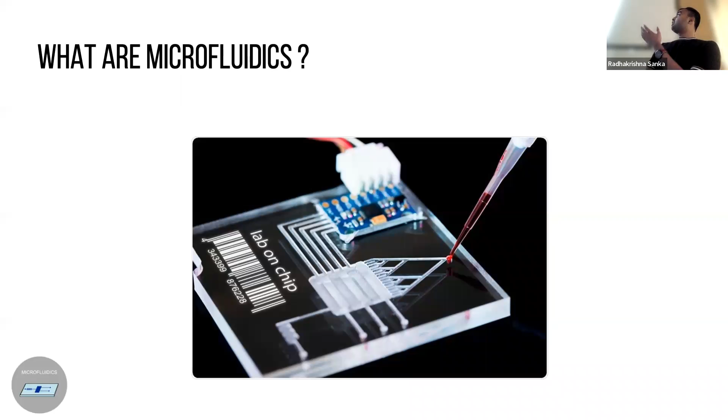So let's start with what's microfluidics. I know most of the folks over here probably know what microfluidics are, but I'm sure a lot of folks on the Zoom call don't really know what it is. So what are microfluidics? As the picture kind of entails, these are small plastic devices. And what you do with them is you insert small volumes of fluid into those plastic devices. And what the device will let you do is manipulate and sense these fluids.

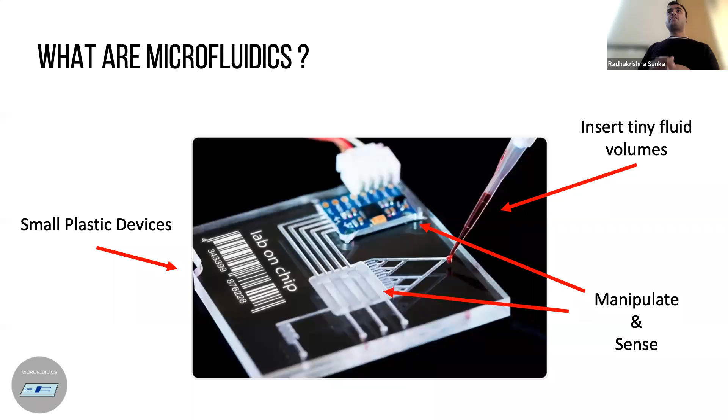And so whether you do any chemistry on it, any biology on it, or even nuclear physics on it, it's essentially just a way to move fluids around. And that is all you need to know for the time being. I'll be giving you more explanations of what it is as we go along.

So where are they used? They're heavily used in diagnostics, everything ranging from a glucose sensor to a wearable, or even if you wanted to miniaturize our entire COVID testing facility, it could be done in a microfluidic device. There's a whole bunch of reasons why that's not happening. And what I'm doing right here is to make that easier to do.

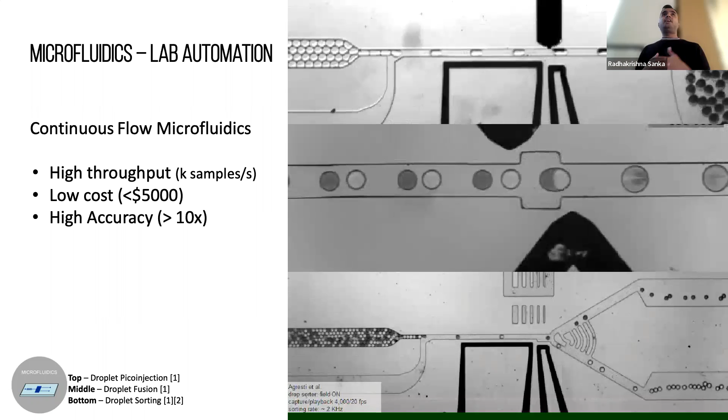So the bigger reason about why you want to do biology is that my advisor is one of the pioneers in thinking about engineering biology like an electrical system. Just like in an electrical system, you have different ways of engineering it, different abstractions, like digital electronics, analog electronics. You think about it in terms of memory, communication, and whatnot. So let's say you wanted to engineer biology in all these different abstractions. You have a whole bunch of activities and you try to think about what metrics are actually important for that.

And so the metric that is actually important as a researcher building these automation systems or research practices is that every practice needs to be repeatable, so that if one person does it, another lab should be able to pick up the same protocol, do the same experiment all over again, and make sure it's actually reproducible.

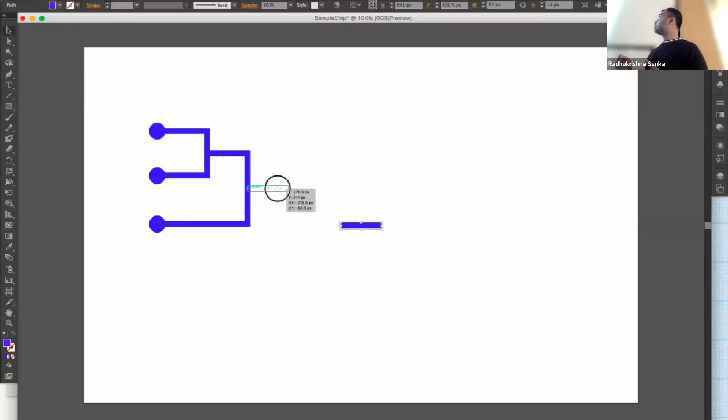And this is a very, very simple device, and it takes you so long to actually make it. Because anything you need to do, you need to draw shapes, draw lines, and make sure you rotate them as it's over there and make it do what you want it to do. So now, as you can see, it is kind of tedious, right?

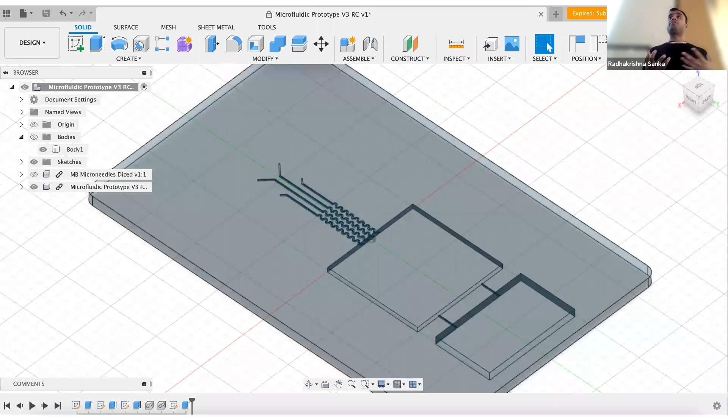Now, the smart people, folks with some mechanical engineering background, go about using tools like AutoCAD or Fusion 360 or name your favorite mechanical engineering CAD tool for actually doing these designs. Now, it's okay. These tools speed up all the work you need to do. You actually can preview what the actual device would look like once you make it, and it's great, right?

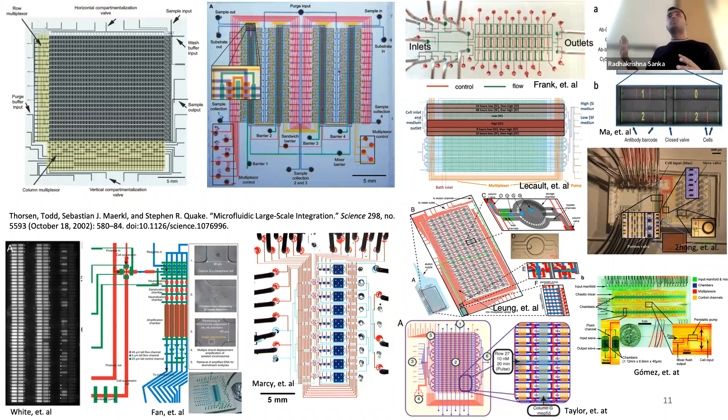So you might be thinking, you know what, Krishna, nobody's ever going to make those devices. All I need to do is make my simple device, and I can just use Fusion 360 or my favorite CAD tool. Or you want to use Illustrator? That's totally fine. But when I think about why microfluidics CAD is actually important, let's say you have an idea, right? You have a concept of what you want to do, like an experiment or some kind of a test you want to do.

So you probably spend about, like, 3 clock cycles, I'm approximating it to a week, just reading up different papers and literature about how these devices might work, who has done what in the field, and you come up with what we call an architecture. So it's kind of like a high level idea about what your device should be. Then you spend about a week making the layout, checking with people who can actually fabricate it, and seeing if whatever design you drew is actually manufacturable.

Then you spend a constant amount of time based on what fabrication process you're using. It might take a day, it might take a week to actually make the device. Then if you have things like valves and whatnot, and you have some automation associated with it, you need to spend some more time scripting the entire thing. And once you do all of this, you go into a verification step where you actually verify whether or not your device is actually useful.

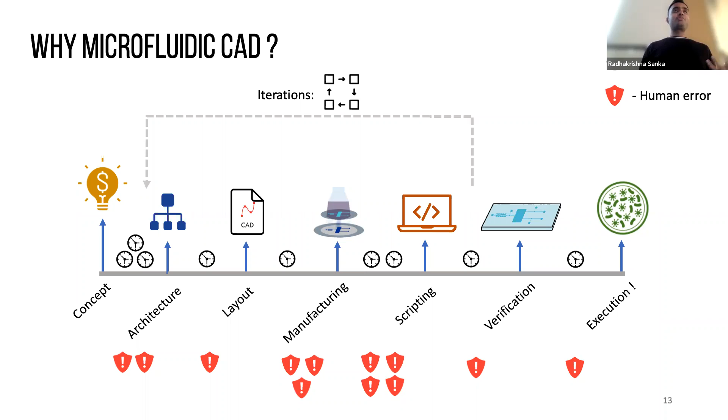And I guess it's probably the most computer sciencey part of my entire talk, where I say, if you had to put an algorithm to characterize from concept to execution, that would basically take you a time of 5 clock cycles times the number of iterations, plus the 4 constant clock cycles that will always take you.

And that's where all the research I've been doing and what I'll be presenting to you helps, because by having standards, you can get rid of these iterations, because you know for a fact that if you make the design in a certain way, it's going to be manufacturable, or it's going to work in a certain manner. Then the second part is you have algorithms that nearly eliminate all the human errors and greatly reduce the amount of time you need to spend actually making the design, and you can go about doing your own favorite hobbies or whatnot.

So if we rethought that entire concept-to-execution phase as a specified design and build process, as you can see in the slide over here, your time from concept to execution basically goes down to the four clock cycles. And that means that we can also do a lot of these things in parallel, auto-generate all of them, and get things done. So I'm not the first person to actually think about these things.

My predecessor, Cassie, was one of the first people in our lab to start thinking about a computational workflow for microfluidics. So in her work, when she started off Fluigi, what she said was, okay, from one of the synthetic biology design tools called Cello, if we give it an input, can we make a microfluidic device that would do the test for that particular input design that you give to it?

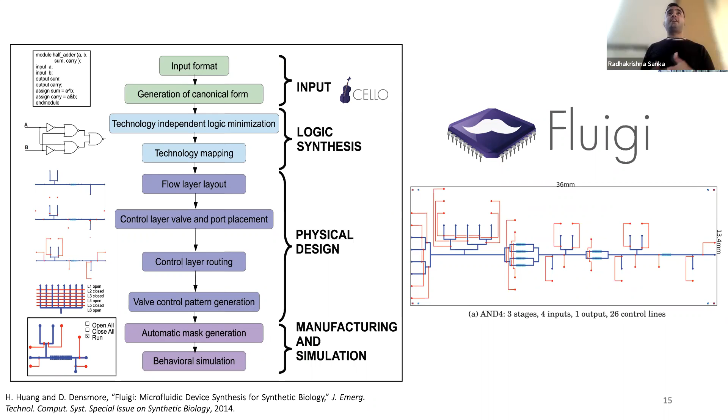So that's where I came in, because I basically took Fluigi and instead of having it as a standalone tool, I converted it into a tool chain. What it basically meant was that I added two new description languages called LFR and MINT for describing microfluidics at different levels of abstraction. I introduced a standard called Parchmint that would let different research groups and industry be able to share these designs and actually capture all the details that are usually missed in literature.

Then I built two CAD tools called 3DuF and Neptune, which you will see some short demos of during the presentation, which allow anybody to go in and start doing it. We've had everyone ranging from high schoolers to grad students use these design tools to make devices while hardly knowing anything about microfluidics.

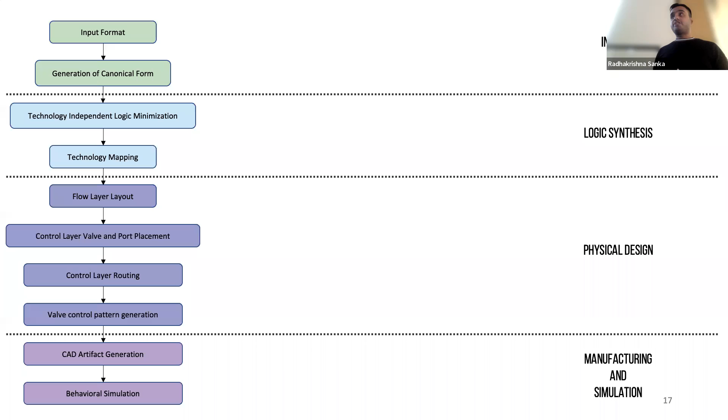So if we think about this entire workflow, which my predecessor Cassie put together, we basically split it up into input and logic synthesis, physical design, and manufacturing and simulation. That's how she divided these things broadly. So in her work, when she did it for the Cello input, there were certain kinds of input formats and canonization that was done for Cello.

So she knew exactly what the input would need to look like, and she knew exactly what output needs to be generated for that given type of input. So she created the entire logic synthesis step, and she basically hit it out of the park. She went all the way through, got physical design done, got everything done. So when I came in, to kind of parrot one of the things which my descendant, I guess, Ron said, what is left for me to do?

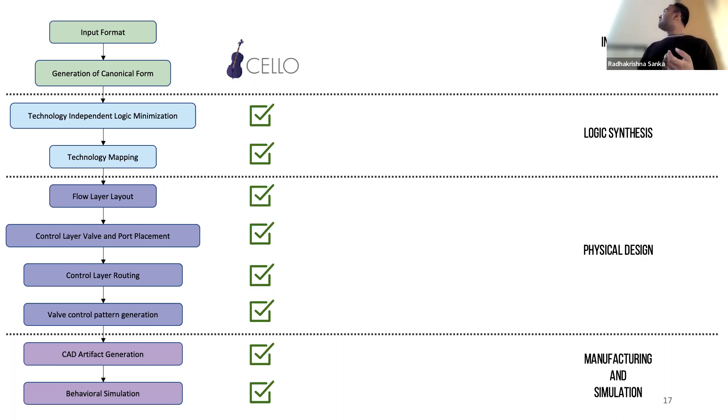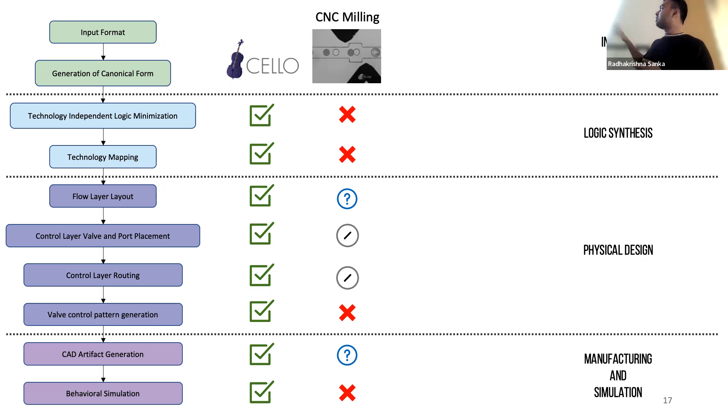So I was like, no, wait. If we needed to take the same tool and use it for CNC milling, it's not really synthesizing what we wanted to do in our droplet scenario. And maybe it's not going to generate for us some other examples too. And we're not sure if the manufacturability is actually valid.

Then we were like, okay, fine, let's try laser cutting, like what some of our friends at Mo's lab use. And we were like, okay, can we still generate the designs? Can we generate the layouts? Can we do that? A lot of things were still up in the air. But when it came to synthesis, you couldn't actually do it at all.

And similarly, because the main platform which Cassie considered was photolithography, there was some promise for it to actually work in photolithography, but almost all of it was unknown. So the first part of what I did during my dissertation was I looked at how do we solve this manufacturability problem. If we made a design, we should be able to manufacture it. Otherwise, this tool is useless.

Then the second thing I did was I looked at, okay, can we improve the way in which the physical design is working? Can we extend it and make sure that we're getting design outputs for every kind of device we throw at it? And the third thing I did was, okay, fine. Now we have this whole pipeline of algorithms and whatnot. Can we actually synthesize these things and have representations and formats which make sense?

And that's essentially the contents of my entire dissertation. So every now and then, we'll be revisiting that slide where we have the checkboxes, and we'll be looking at these things. So the first part, as I mentioned, was the manufacturing.

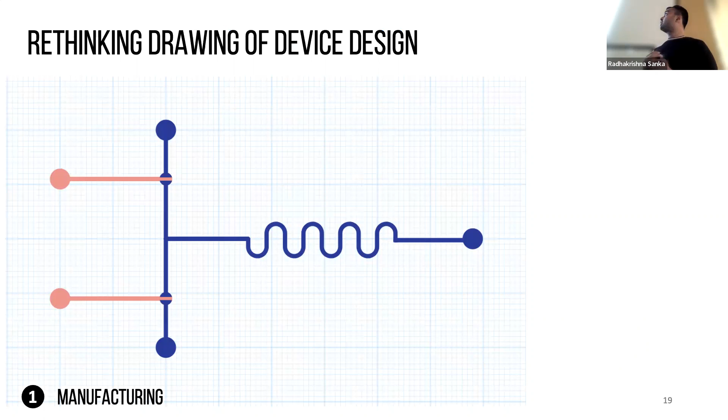So we'll be first starting off with the manufacturing. Thinking about manufacturing, the first step was, you saw how people typically designed microfluidics. They were actually drawing on a canvas. So the first thing we needed to do was rethink how people were doing this. And what that meant was we essentially said that we're not going to draw anything anymore. We're going to decompose the designs into components and connections. That way we can store it as an object and utilize it.

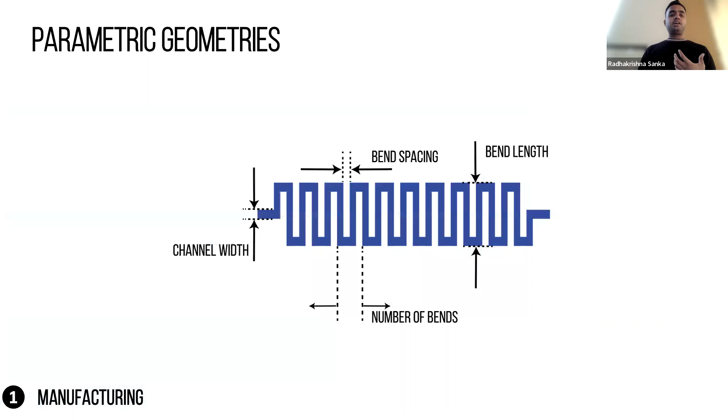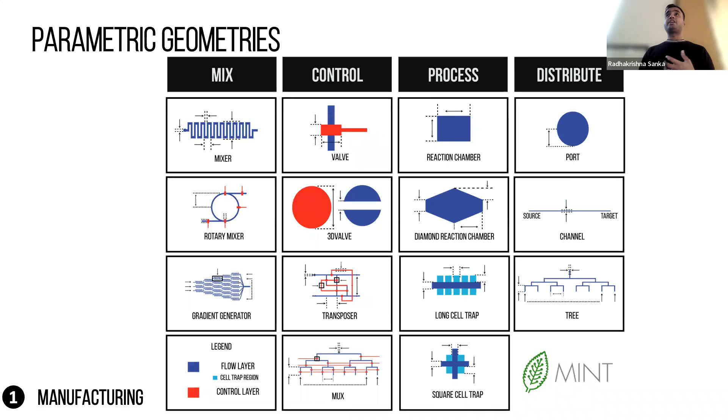And what that meant is that each and every component would also be parametric, and it would allow us to do any kind of microfluidic engineering. So we created this entire library of components which we could use for any design. And the best thing was, because all these components were procedurally generated, it meant that it was scalable. Drawing the one on the right would have taken somebody forever. And that's where you have the real power of using procedural design.

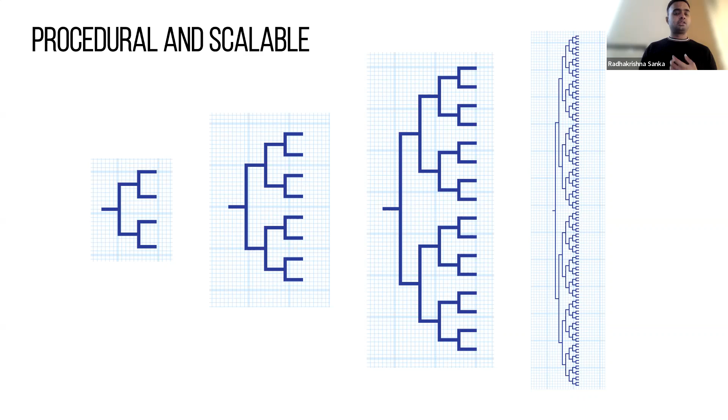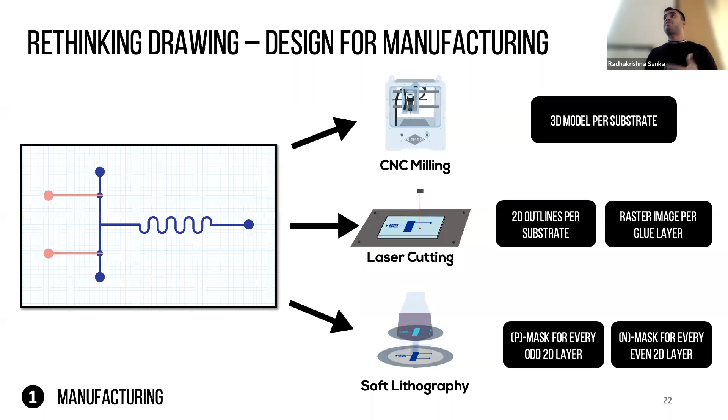So the next part was, okay, now we talked about rethinking the design, how we abstract it. What about the design for manufacturing? When we looked at the different manufacturing processes, we realized that all of them require different types of CAD artifacts for the software and the downstream manufacturing process to actually manufacture it. So we took every single component and connection and started decomposing them into what we call features. And I assigned a DFM class to each one of these features to indicate what kind of manufacturing capability it would have.

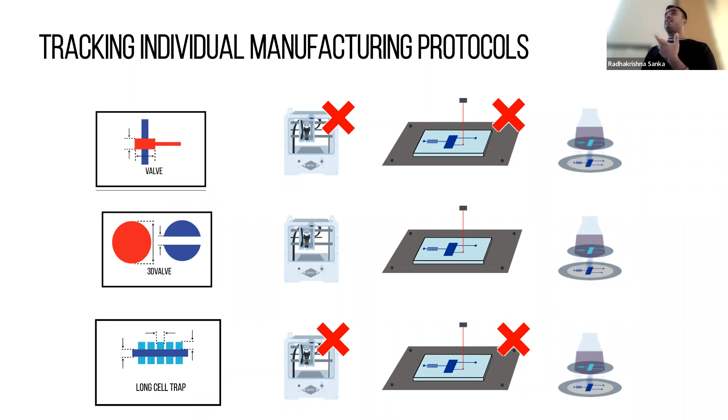So now every component, because it's composed of different features with different DFM classes, you could individually track which component is manufacturable by what manufacturing process. And because they're all parametric in terms of geometries, you could also check, using something as simple as a CSV file, whether or not it's actually manufacturable through a process. So with something as simple as a for loop, we were able to generate all the CAD outputs necessary for any kind of manufacturing process.

And it was so simple that even one of my undergrads, Liam over here, was able to extend it to include integrations like electrodes, capacitors, optical elements, and whatnot. So it was something that could expand very easily.

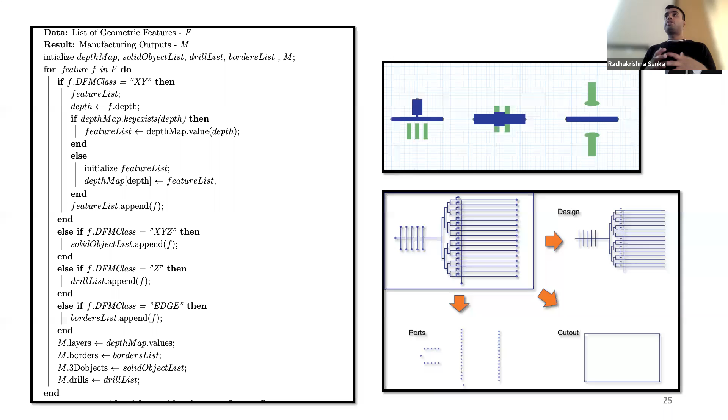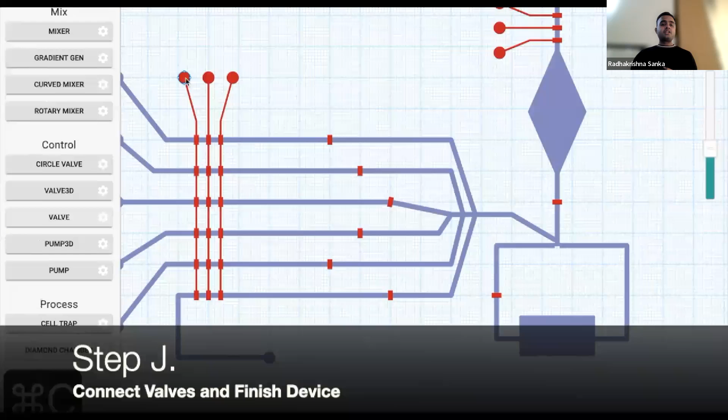And this would have probably taken an engineer or somebody experienced in doing CAD design at least an hour or so. And every feature you see over here is parametric, which means that if you needed to change something, you wouldn't take that long to do it. And it's not just a drawing tool.

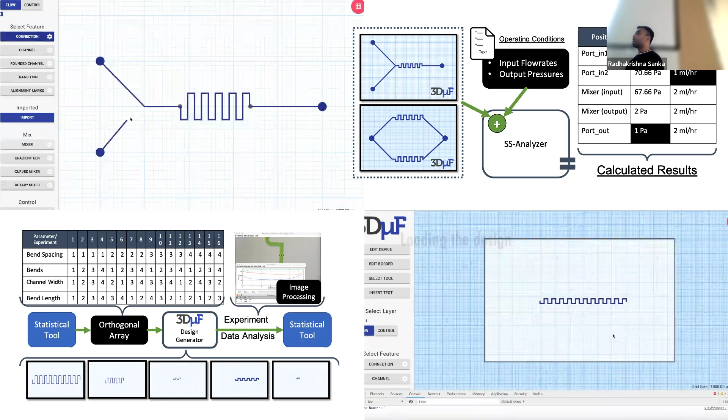Basically, we were able to show how you could actually do design of experiments with these tools, because we could integrate design like Taguchi design algorithms into it to generate variants. Then we could also evaluate the flow and pressure conditions by the underlying device model beneath it by just adding some resistor models, which we put over there.

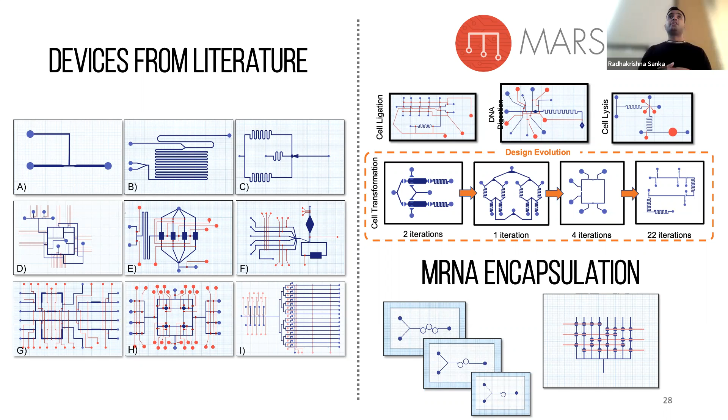And over the years, we've been able to replicate devices from literature. We had an undergrad team in a project called Mars, where they really knocked it out of the park, and they made over 100 devices over the summer. It was crazy. There were microfluidics everywhere. And now, more recently, we have a BME senior design project working on an mRNA encapsulation device, which would be super portable and DIY friendly in the future.

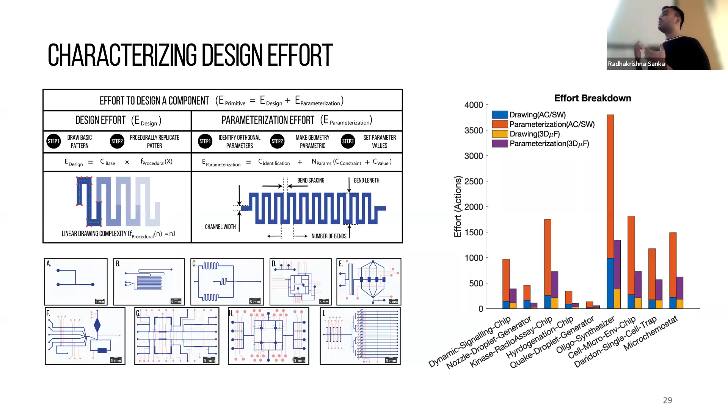And it's not just that. We created heuristics for measuring what the design effort is. And we were able to show how our design tool was actually able to reduce that design effort. Because anytime anybody talked about why do we need to make CAD tools, the biggest question in an academic circle was, what's the heuristic? What's the metric? And so we actually created these heuristic metrics for capturing how long and how hard it is to make these designs.

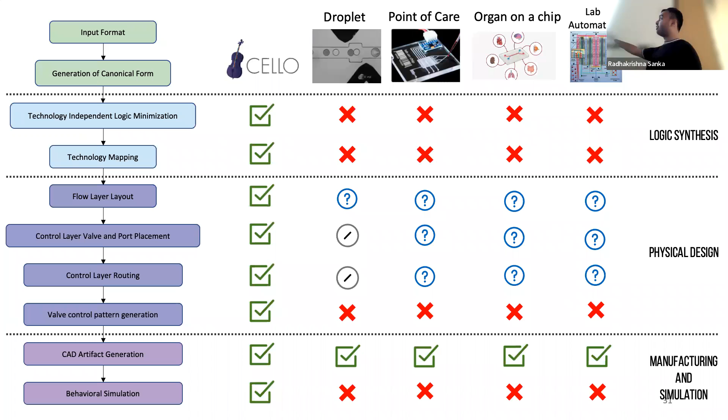And we published all of this under the paper 3DμF in 2019. It was one of the top 100 downloaded articles in Nature Scientific Reports. And so, through the work in 3DμF, we were able to address a lot of the issues that were missing in the manufacturing side. And I hope with the examples I've given, I could show how useful and usable it is. Next up, we're going into the physical design.

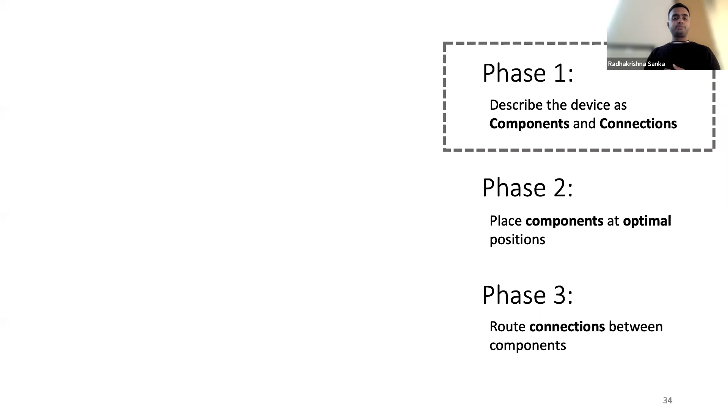So the first thing I'd like to introduce is how do algorithms automatically design devices? Based on the premise that I gave earlier, if this is a design, let's break it down in terms of components and things connecting them as connections. So if you were asking an algorithm to do it, the first thing it would do is a placement step where you would describe all the components and all the connections between them as a graph. Then it would place them, and through an algorithm, find the optimal positions for all of them, and then finally make the connections between all of those designs. And that's called routing.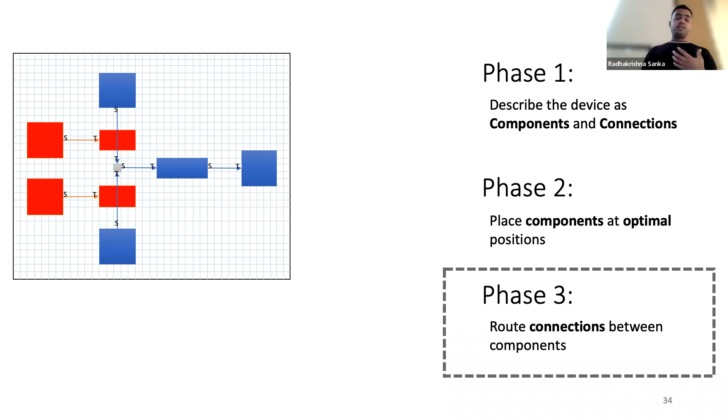So when we were trying to make updates to Cassie's place and route algorithms, we realized that it wasn't working very well for all kinds of scenarios. And so I looked into the literature at what other papers were out there, and I was trying to evaluate them against what the design flow was, what the standardization was, what the algorithm was, and what the performance is. And I realized that there was something wrong with the entire standardization process. There was no standard way of doing anything.

And even in the cases when people use the same benchmarks, it turns out the way they actually represent a component is very different. You might be like, okay, in an algorithmic world, does it even matter? It actually does. When you're doing physical design, these constraints on how you model the device, the component, make a lot of difference. And the worst part is half of our component library won't even fit into these molds. So there was no way to actually utilize those designs, even if they gave me the algorithm, to just use it straight out of the box.

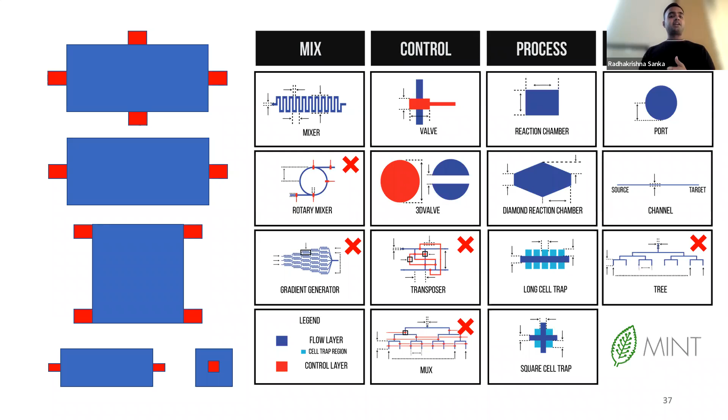So in order to start addressing some of the issues over there, folks at UC Riverside and we created a standard interchange format. And then what we did was we created a bunch of benchmark sets. The benchmark is essentially a device description of what the components and connections are. And we basically ran them through both of our placement and routing algorithms.

And when we ran them, unsurprisingly enough, our benchmarks worked very well with our place and route. Their benchmarks worked very well with their place and route. And that was like, okay, fine, this is great, but we need to figure out all these. And it turns out the reasons why they were failing were so many. It was everything ranging from running out of RAM, or for some reason the layout was never actually getting an optimal solution. It was all over the place.

So we said, okay, we need a way to think about algorithm performance without actually getting into the weeds of the implementations. And so in order to do that, we came up with this analytical tool called benchmark spaces. So just to slow down a bit, a benchmark space is nothing but a 3-dimensional space based on some of the device properties. And every benchmark we have, every device design description we have, falls somewhere in that 3-dimensional space. And by just running all the benchmarks we have against a particular algorithm, we can draw a surface between the fails and successes and say that that is the algorithmic limit.

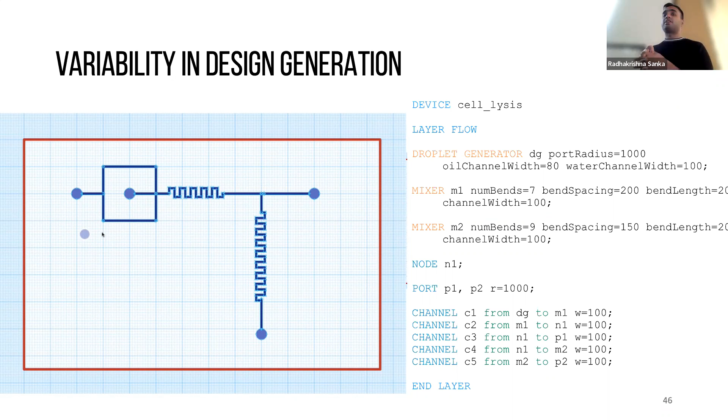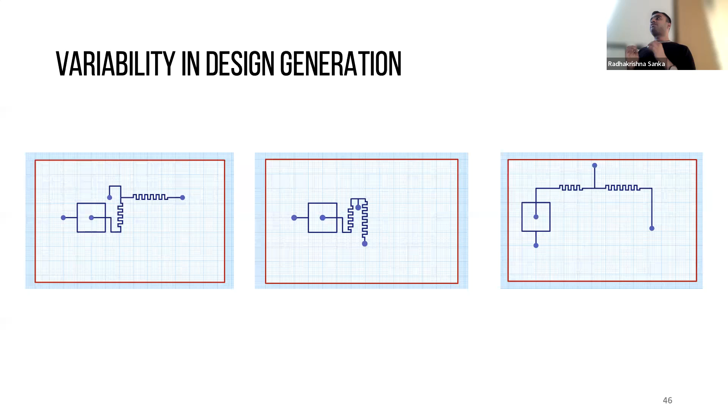So let's say you take this exact netlist description and you give it to a placement algorithm. It could generate layouts something like this. All of them are correct as per what the netlist said, but they might not work, or they might not look nice, or it might make a really bad figure in a publication, so nobody might want to use it. So in scenarios like this, I was like, okay, let's look at how other people solve similar problems.

So I started digging into how analog VLSI folks thought about placements, because when you're doing analog designs, the exact symmetries and how you place the different blocks, every cell you place really matters. And if you don't do it right, it can really destroy your entire design. Everything is that sensitive. So I looked at the most extreme cases where all the aesthetics and layout details are important to see how they're doing it. And no surprise, they had a whole bunch of layout constraints to ensure that the layouts would work out exactly.

And so what we did then was we added to the MINT netlist description language this entire constraint description language, and I formalized it, I baked it into the grammar so that it would be formalized and always captured whenever somebody is describing the design or automatically generating the design.

And that entire work effort has spun off this next generation of layout algorithms using sequence pair representations and integer linear programming formulations to actually account for these kinds of layout constraints. This is ongoing work right now with some of our collaborators, and we are hoping by the end of spring we'll have some really good results that will be part of our Neptune publication. So all of this work culminated into two papers, one being a conference proceeding and the other being an invited talk at ICCAD.

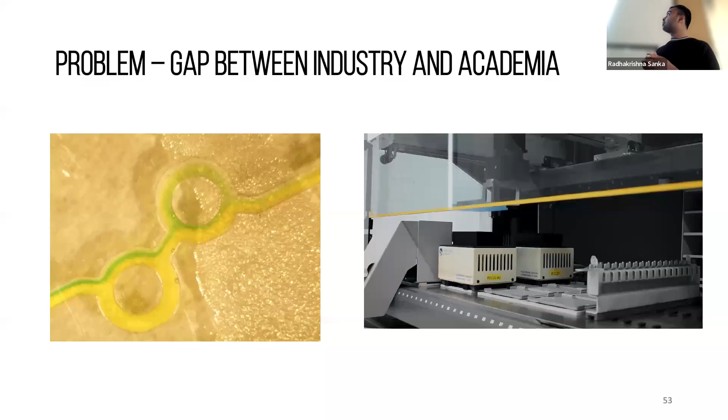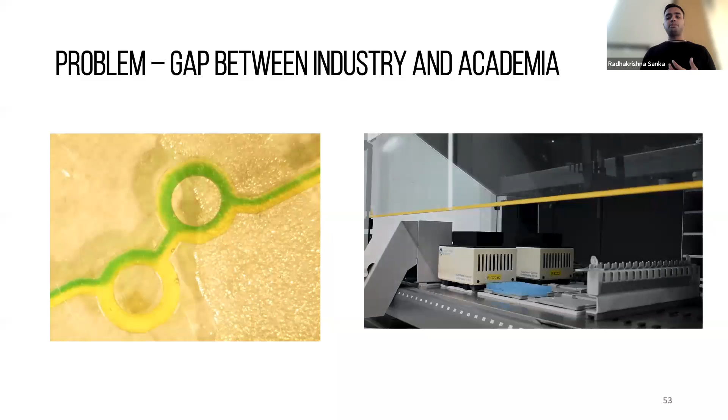And when you actually go into industry, what you see are things like on the right, where you have liquid handling robots moving small volumes of fluid around. So with something like that on hand, the big question was, there's so many people doing all this microfluidic design automation work, what are the missing pieces? What's going on over here? Because of the ones which weren't the physical design, everything else was talking about synthesizing microfluidics. We're doing some architecture synthesis. We can solve all these cool new problems and whatnot.

And that's kind of captured in this little block of what my predecessor Cassie put forward, saying that, given some inputs, from there doing some technology independent logic minimization and some technology mapping. So that's how she broadly placed it. And after actually digging into this literature, and a bit of wisdom and fails and whatnot, I realized that it's not just those 2 blocks, but it actually expands into more steps. And one of the bigger issues is that none of them use the same, and there's no actual standard input format or any kind of canonical form which everybody agrees on in all of this literature.

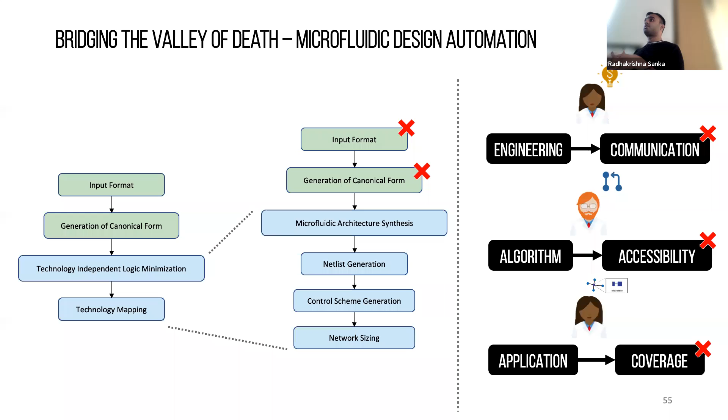So the big problems basically became, if you had the engineering know-how, if you wanted to do the engineering, there was an issue of how you wanted to communicate the problem. If you had an algorithm, there was a problem of how do people access it? And if you had an application, your algorithm or implementation would probably not work for the specific biological application somebody wants it for. And so you have an issue of coverage. And that's where the genesis of Neptune happened.

So what we wanted to put together was this cloud-based IDE that would basically host all the algorithms and make it easy for anybody to access, have standard input formats so that people could just come in, use the same formats and run all their design tools, and also have coverage and make sure that you can actually fabricate the designs that come out of it. Now, the good thing is when we think about coverage, based on a lot of the work that was being done in our group, if we looked at all the component libraries we had, there was one interesting thing that we could take advantage of. The distribution of these different components was very tight, which means that most of the components used by people are this one small set. In some designs, you might need something unique, but for the most part, there's the same components everybody's using.

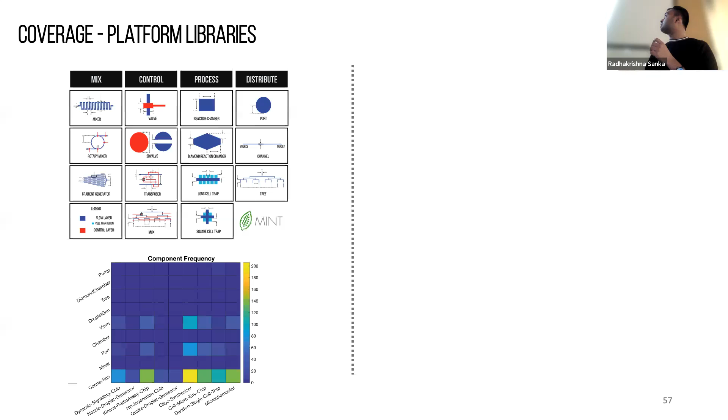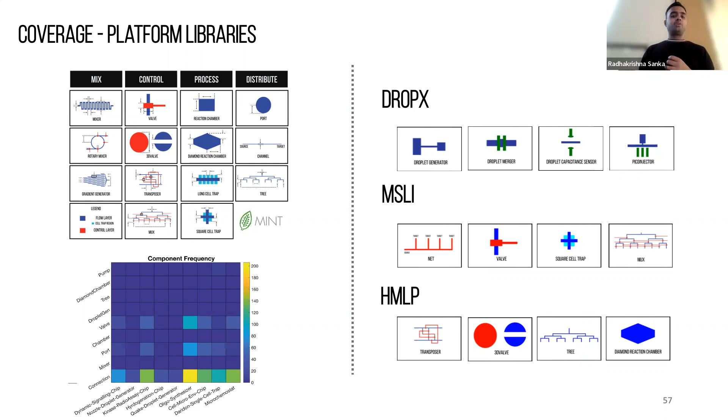So taking advantage of that statistical distribution, I created these 3 platform libraries. One is called DropX, intended for designing droplet-based microfluidics. The second one was MSLI for doing tightly packed photolithography designs. The third one is a hybrid multi-layer platform integration, HMLP, which was able to merge together millifluidic and MSLI style, photolithography style devices together. So I separated all these different components into their specific libraries, and I said, okay, now each one of those things is a primitive.

Now, taking advantage of all the work that's already being done, if you think of a primitive inside that platform library, you can get all the manufacturing info from 3DuF because it was doing all the DFM classes and whatnot, which I was talking about. Then if you wanted to think about the fluid dynamics, it would take advantage of my colleague Ali's work in using machine learning and inverse design for predicting how the component would behave under certain conditions. Then we could also standardize all the microfluidic engineering knobs, like what can you change, what can you not change, using the standards we defined in our standard Mint library.

And then finally, I also created these very rudimentary system engineering models of how you piece things back together and how you create a device design from it. With this, we have only these three basic models, which account for what kind of inputs and outputs there are for every device design, which means that now we can basically abstract every difficult aspect of engineering a microfluidic device in its own little tier, and people can keep extending each one of these tools and different libraries in their own sweet time.

So the next part was communication. So the big question was, can designing microfluidics be as simple as designing electronics? And for the folks smirking over here, if you wanted to design electronics, you would probably write something like Verilog, and it'll synthesize the entire design, and you're happy. You have it on an FPGA or whatnot, and you can do it.

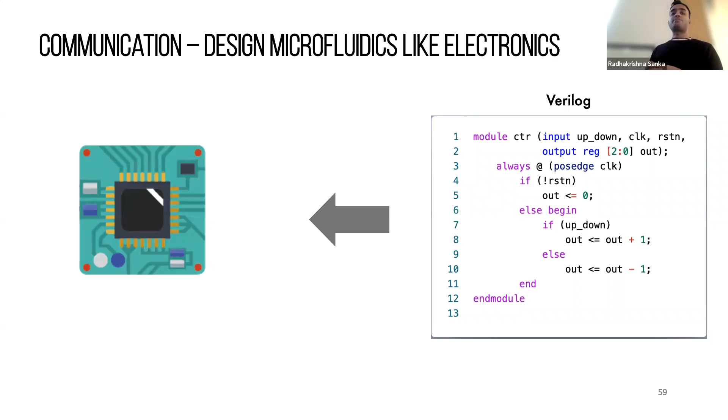And so the big thing was, how do we do it for microfluidics like this? How do we make it as simple as doing this for microfluidics? And that's where my advisor was like, describe microfluidics based on how liquids interact. I can't do the imitation, but he said something like that. So out of that, LFR was born.

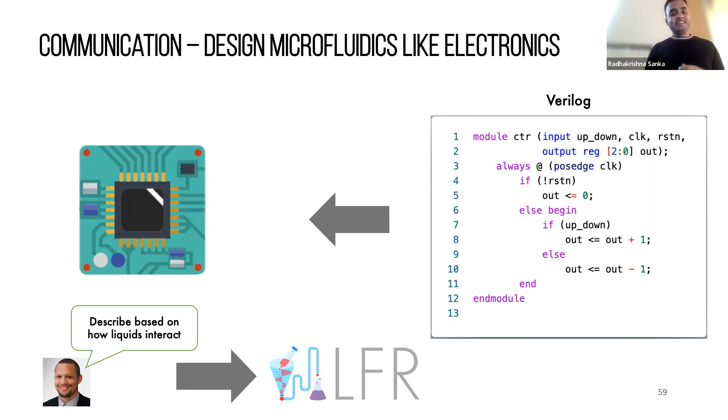So when LFR was born as a design language, I was like, okay, fine. How do I make this happen, right? This is so abstract. So I started digging into literature, and what I did was I started borrowing vocabulary of what these interactions are and what they might mean from papers like Aquacore and whatnot.

Then I borrowed some formalism from papers like BioScript, which is a programming safe chemistry language, and thought about how these interactions would work. What would it actually mean to mix two things? What does it mean to separate two things? And I borrowed some of the formalism from there.

And then I also borrowed some of the relationship ideas from Nada, who's on my committee, from her master's thesis. I think it was the second or third paper I read during my PhD program. So it was kind of cool for me to be like, okay, that one paper I read back then, I could probably use something from there.

And so what I realized was, while Nada had this entire way of describing instruction set architectures based on the relationships between different fluid flows, I was like, okay, fine, I don't need all of it, but I could use the and/or relationships and just build on top of that.

And so, thinking about Verilog, for those who don't know, it is an interesting language, like any HDL. What you do in Verilog is you describe the device design. You don't literally tell it how to execute, but you tell how it's supposed to behave when some input comes into it. One of the bad things about that is it's hard for people to start up with.

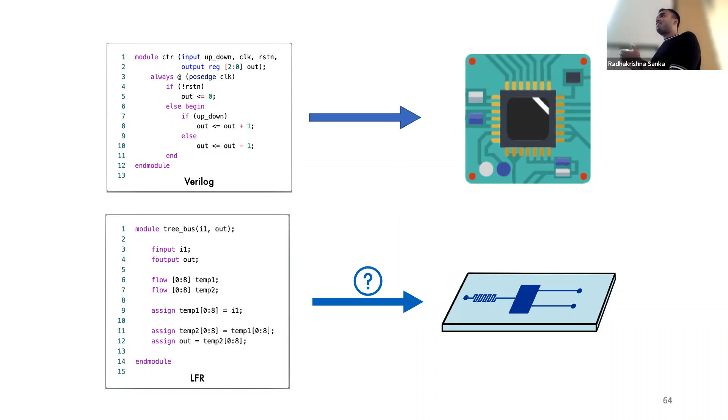So what we now have is, just like how you go from Verilog to an electronics chip, we now have a way of describing microfluidics consistently well, taking all the vocabulary, considering relationships between flow, control, and all these different aspects of a microfluidic device. But now the big question was, now that I have a great language, how do we actually get from the language to the actual device design? All of that was great, but that is the real problem, I guess, why I get the PhD, I hope.

So the way most people worked at mapping a description to an actual physical element was through something called technology mapping, which even my predecessor Cassie did in a certain way. On the top is an example of Dagon, where you take a certain kind of logic circuit, and Dagon would be able to map it to a different kind of logic circuit. So it's a binary circuit input to a binary circuit output.

One of my predecessors and friend, Prashant, for one of his works in Cello, was able to use DAG rewriting to basically take any kind of digital logic description and map it to a genetic circuit construct. And so the power of technology mapping was that you could jump leaps and bounds with it.

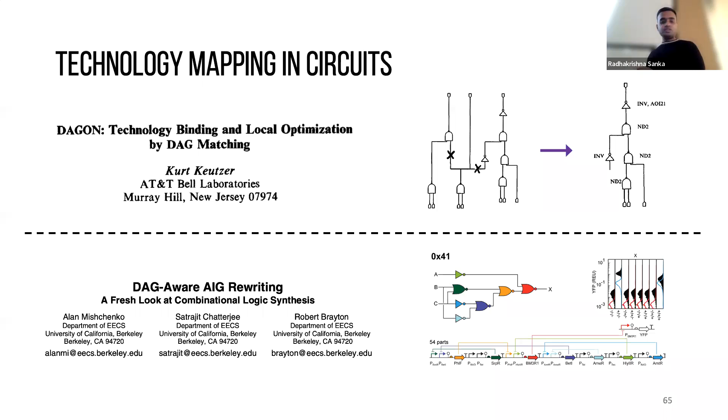But the issue was that microfluidics is not exactly digital logic. In both of these cases, your inputs were digital logic, your outputs were digital logic. The digital logic might be in different form, but it was still digital logic. But in my case, that was not the case, especially the interactions between the flow and control layers. That wasn't digital logic anymore. While I could force feed all the other vocabulary and formalism into a logic circuit type representation, I couldn't do that for the relationships.

And so that's where the entire synthesis workflow and this algorithm called ScriptSlate came up, where we ended up having this two-step technology mapping process where I would first map the library primitives onto the logic description, and then from there construct the entire final device design. I'm not going to go into the detail of this because it'll probably take an hour to go through all the steps, not to even talk about the other hour or two to go through the entire compiler steps.

But what essentially happens is, let's say you wanted to describe a device like this using this process. First, you would declare your module and what your inputs and outputs are. Through that, you implicitly said what all your ports are. Then you declare all these intermediate locations, like flows and storages, which are the connecting glue that stitches together all your functional blocks inside the device design.

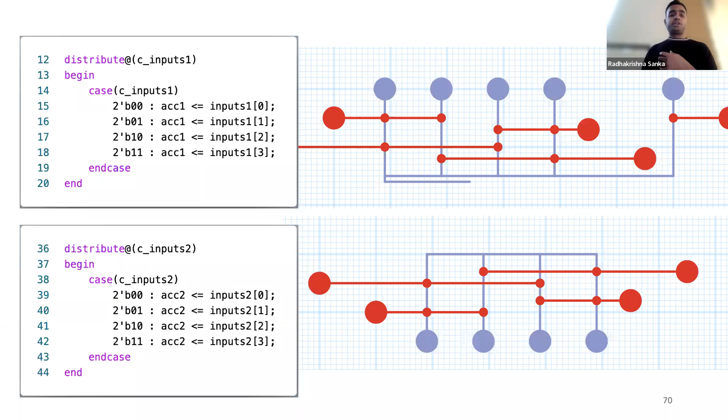The next thing, using the distribute syntax which I had, you'd be able to describe the relationships between different flows, thereby generating these multiplexing inputs and outputs to the microfluidic device. Similarly, because we wanted multiplexing to the storage, you would also be able to describe a smaller version of that. Then finally, you'd use the assign statement to stitch together all these different functional blocks described in the other places, and have your full device described through the process.

So in order to do this, what we basically were capturing was what the logo you see up there is, what we call the FIG, the fluid interaction graph, which is this huge data structure that captures everything inside the LFR. Now, the reason we created this data structure was so that if somebody wanted to put another automation tool on top, you don't want it to generate LFR syntax, because generating human readable syntax is harder, and it's easier to have a standard data structure which you generate to and then pipe it with more automation in the future. So what the fluid interaction graph basically captures is the structure.

The flow annotations, derived from Nada's work, basically capture a relationship between different flow and control layers. And finally, we have another item over there called the distribution tables, which actually captures the control logic which drives each one of these control lines inside this microfluidic device design. So it'll be something like this. As I said, the top part captures the structures. Over here, we're showing all the relationships with some arrows going as more nodes over there. That's not exactly how it is, but I had this over here for easier representation.

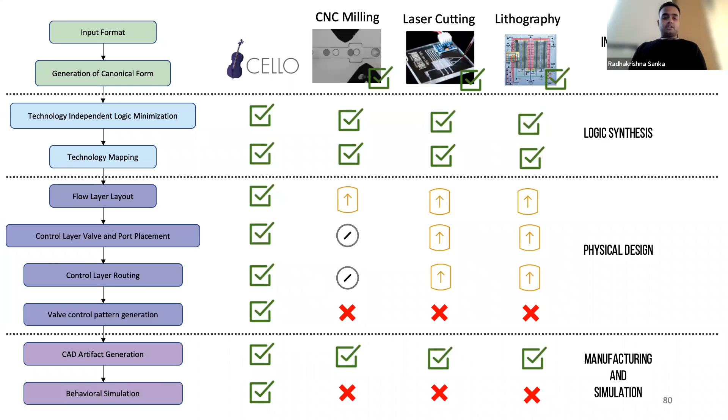So through this entire process of creating LFR, Neptune, and orchestrating this entire design flow, I was able to solve a lot of issues in terms of what the input canonical forms would look like, and what the technology mapping process would look like. So I hope the demonstration and the talk I gave you give you some idea that it's able to completely capture what a microfluidic design is, and also that it's a versatile device language, right?

Because now it's an open language with multiple stages where we can add more and more tools and design methodologies. And I hope that in the next 5 years or so, we are actually able to move away completely from manually describing device designs and go fully into having these kinds of device designs.

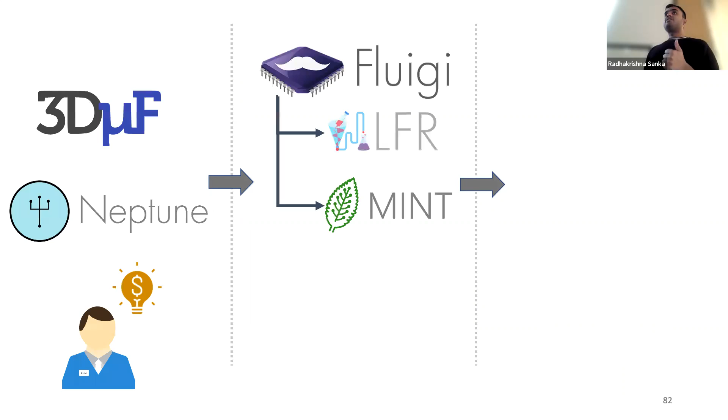So if you took away nothing from this entire talk, what you should know is that now, because of the work I've done, if you're somebody with an idea, you're able to access one of my design tools online. You're able to seamlessly utilize all the design languages which are underlying in all these design tools. And then you're able to generate designs which are actually fabricatable at the end of the day. And if you are somebody who's making a microfluidic device, that's awesome, right? This is a device design you actually want.

And if you're somebody with a new microfluidic component, you can actually add it to our library. It's not that this component library is static, because everything is open source with a whole bunch of tutorials, especially one where I have an hour-long tutorial on how to actually add new components onto it. You can add it to the library. Or if you're somebody with a new algorithm, again, everything is open source. We have standard input formats. We are standardizing all the interfaces in all the stages.

So if you have a new algorithm, you can hook it up with the rest of the tool chain, make it use LFR designs, generate the things, see whether it's working or not, and basically utilize the same downstream pipeline for actually manufacturing your designs at the end. So that is what I've enabled, this mixing of all these different people, from the person with an idea to the user to the folks doing both microfluidic design research and microfluidic design automation research. So this is kind of like the bridge that covers all these spaces. As Doug said, I was building a lot of glue, and I believe this is the glue I've been putting together.

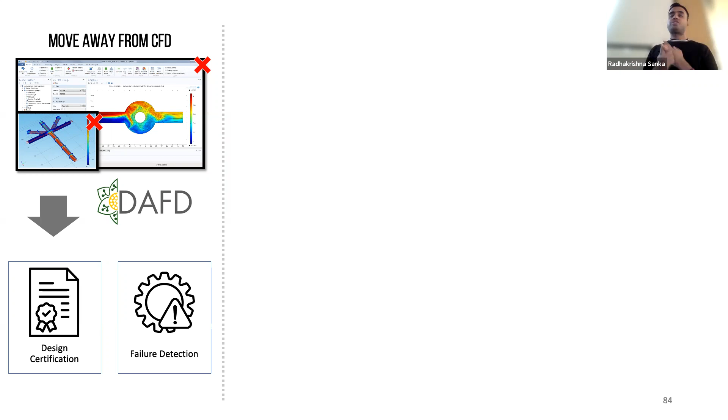So I said, can we reframe the entire question into a design verification problem, a design certification problem, and a design fault detection and failure detection problem? That was the goal we had for that course. So what we basically did was we modeled some of these designs created by my colleague Jing as transition systems. And we did a very simple analytical Monte Carlo simulation to see what different geometric parameters would define good and bad states.

Because we had these transition models, wherever it's blue, it's a good state to have. Wherever it's yellow, it's a bad state to have. And what we saw was, as we varied the different dimensions of the height and width and different aspects of those channels and the junctions, we had this huge complex space where we were like, oh, you know what? It's a very complex design space where we need to actually solve stuff.

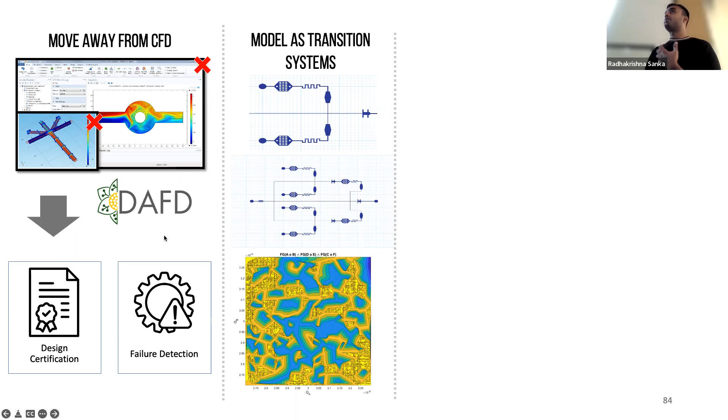And so that made us start thinking, okay, if that was a design space where we wanted to be able to identify an ideal operating point, how would we go about doing this? And could we do it with the machine learning models, which our lab has been pioneering? So what I did was I again dove back into my good old friend, the analog VLSI world.

And I looked at what people are doing over there for formal verification. What I pieced together as a story at the end of the course was that if we represent the microfluidic circuits as these infinite space representations, then we could essentially stitch together these model verification languages like STL and whatnot. We could put together a language that captures all that grammar, and we could use these hybridized ML models to actually verify whether or not the device would be a success or a fail, or the failure detection and certification problems could be solved using these hybridized ML models.

I'd like to give special credit to Martin for actually putting together all the Monte Carlo simulations and whatnot, so I didn't have to do all the simulation work, and it was really nice to work with him because he did a lot of the simulation work. He always does that. So we were able to actually evaluate whether or not this is a design problem we could actually solve. And we got enough evidence to say this is a cool problem we could actually try different approaches for. And I'd also like to thank Professor Calin Belta for giving us feedback on this entire process.

So what could be coming out of that is, this part where I was constraining what the device operations would be, just telling DAFD these are the performance constraints I need for my microfluidic component, we could actually expand on the grammar here and create a more complete microfluidic performance specification language that would fit in place with the rest of the LFR syntax. And I think that would be a really cool problem, which I would do if I was doing another PhD, which I'm not.

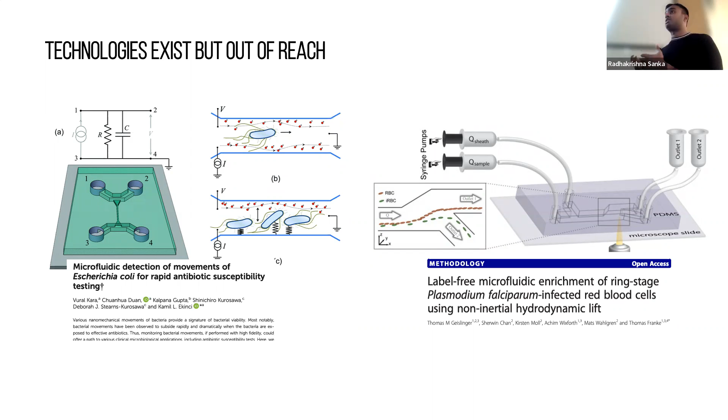And in order to do that, I partnered with some more folks in the community to create this pseudo organization called Distributed Diagnostics, which is basically a community where we're sharing knowledge and trying to match people with mentors so that we can utilize all the free CAD tools I've been building to help them do manufacturing, share the know-how we have within the community of how we do DIY manufacturing, and also make sure everything we're doing is actually reproducible.

And that's where all the standards, which I've been harping about for the last hour, really come into play. Because if one person does it, all the other people need to be able to do it again. Oh, there you go. This is a slide I was missing. So I said, it's like an alien planet for academia and whatnot.

So I'd like to conclude with acknowledgements. Obviously, there are a lot. What I've done is not a one-person effort. I had so much help, everything from moral support and talking about ideas to a lot of heavy lifting done by my undergrads. In fact, I'd like to especially acknowledge all the undergrads I highlighted over there, because they not only did all the hard work, but they actually stuck around until the end to get a publication out or get actual things working and not leave once the semester was done.

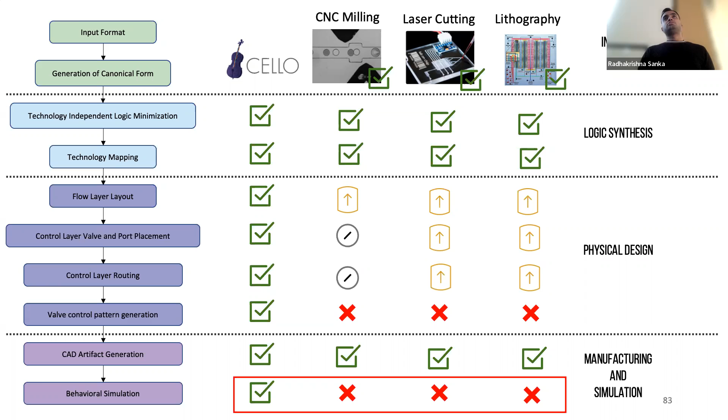And so, looking ahead to building this for diagnostics, could you imagine any sort of design for manufacturing for each of the components? Are you looking at something like design for operation, where different components or aspects of the design process tell you, oh, you're going to need these X number of external components?

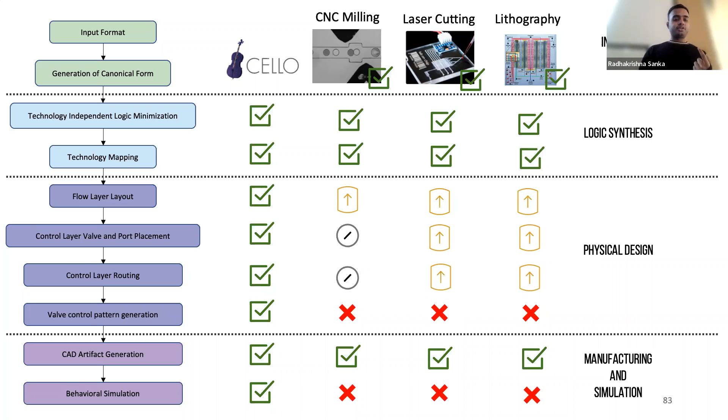Yeah, no, definitely. That's a very good question. So it kind of falls back into this part where I had, sorry, my computer's behaving pretty slow right now. So it kind of falls back into this way in which I described the primitives for engineering, right? So, okay, so it kind of falls back onto this.

But in terms of the actual hardware that needs to come out, you could standardize all the primitives saying that, okay, I have only one kind of a port, right? But I could have a specific variant of a port with specific dimensions or a 3D model attached to it. That would be a specific connector or an indicator, and you could do that. And in terms of pumping, if you need to be able to pump it and whatnot, yes, for the most part, we see all this crazy equipment going on over there.

But one of the biggest issues in the field of microfluidics and industry is the lack of integration, because everybody does this like a DIY sport, and people in the photonics world do it as DIY. People in the electronics world do something else. Everybody's doing their own thing. And so when you try to put all these things together, you have these huge boxes that you need to stitch together.